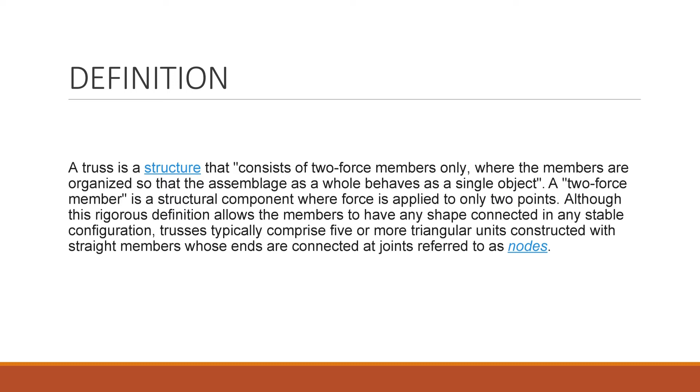For the characteristics, we have 3 types of truss. The first one is a simple truss. This type of truss is seen in a frame roof consisting of rafters and a ceiling joist, and in other mechanical structures such as bicycles and aircraft.

The stability of this shape and the method of analysis is used to calculate the force within it. A truss comprised entirely of triangles is known as a simple truss. A simple truss is often defined more restrictively by demanding that it can be constructed through successive addition of pairs of members, each connected to two existing joints and to each other to form a new joint. This definition does not require a simple truss to comprise only triangles.

The second truss is planar truss. Planar trusses are typically used in parallel to form roofs and bridges. The depth of the truss, or the height between the upper and lower chord, is what makes it an efficient structural form. The third one is space frame truss.

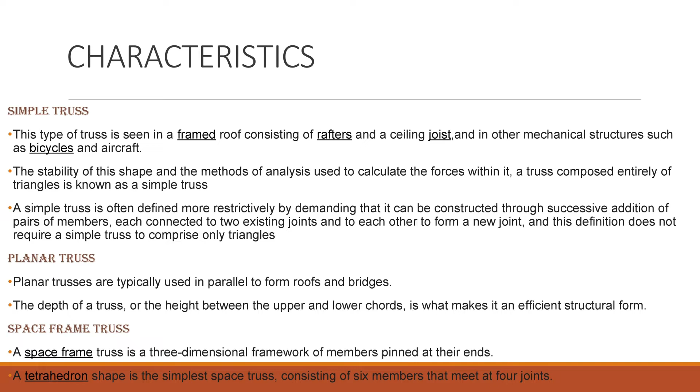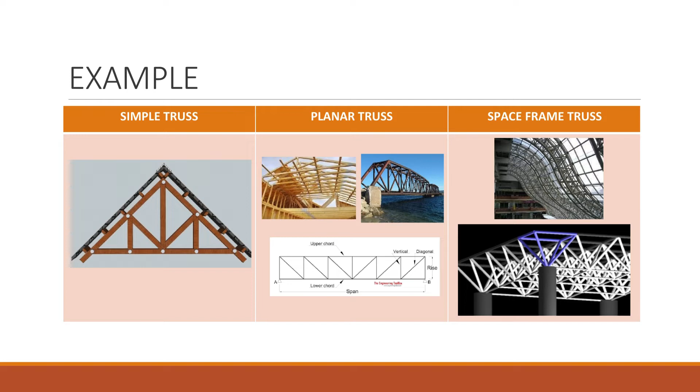There are 2 basic types of structure. The pitched truss or common truss is characterized by its triangular shape. It is most often used for roof construction. Some common trusses are named according to their web configuration. The chord size and web configuration are determined by span, load, and spacing.

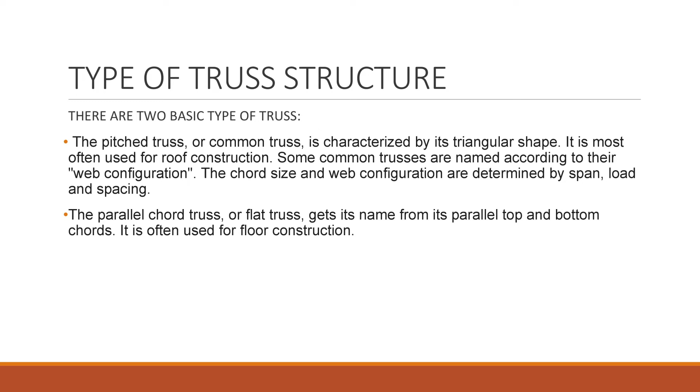The parallel chord truss or flat truss gets its name from its parallel top and bottom chord. It is often used for floor construction.

The second one is octet truss. The minimum composition is two regular tetrahedrons alongside which an octahedron forms. They fill up 3-dimensional space in a variety of configurations. This octet truss is a combination of triangles that can form a 3-dimensional shape. So when combined it becomes one structure. It can be a floor, it can be a structure for a building too.

For the third truss is Pratt truss. The design uses vertical members for compression and diagonal members to respond to tension. This type of truss we basically can see at bridges. There are a lot of bridges using this type of structure. For example, Pratt truss and Howe truss.

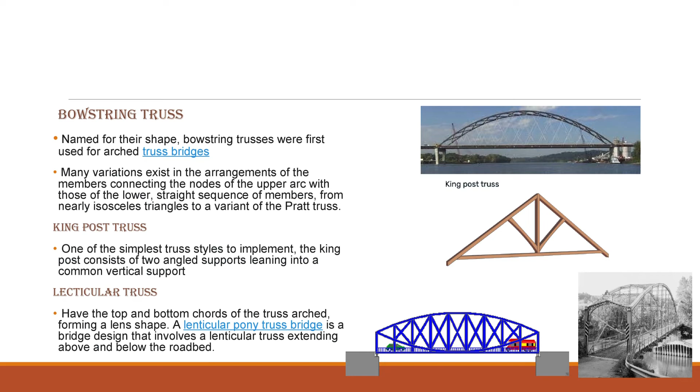So the next one is the lenticular truss. The top and bottom chords of the truss arched, forming a lens shape. A lenticular pony truss bridge is a bridge design that involves a lenticular truss extending above and below the roadbed. So an example of a lenticular truss bridge is the Smithfield Street Bridge in Pittsburgh, United States.

So the next one is the town lattice truss. The town lattice truss uses easy-to-handle planks arranged diagonally with short spaces in between them to form a lattice.

Then the last one is the Vierendeel truss. The Vierendeel truss is a structure where the members are not triangulated but form rectangular openings, and is a frame with fixed joints that are capable of transferring and resisting bending moments. So this one is different because the other trusses are shaped from triangles, but this one is a rectangle with a wide opening frame.

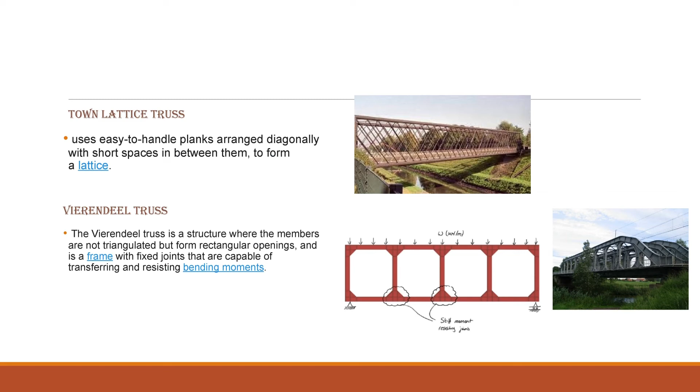So the next is joints. After determining the minimum cross section of the member, the last step in the design of a truss will be the detailing of the bolted joints, involving shear stress of the bolt connections used in the joint based on the needs of the project. Truss internal connection joints can be designed as rigid, semi-rigid, or hinged. Rigid connections can allow transfer of bending moment, leading to the development of secondary bending moments in the members.

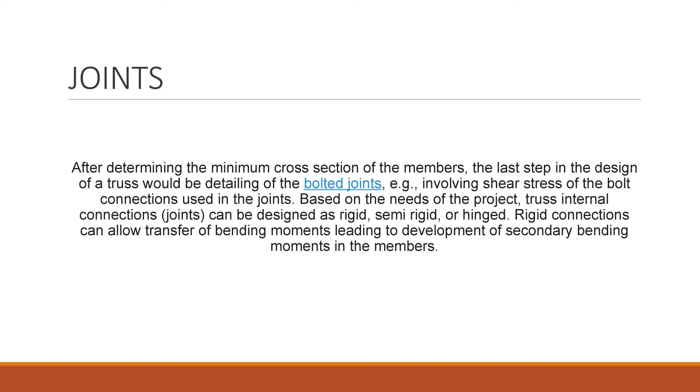So analysis: because the forces in each of its two main girders are essentially planar, a truss is usually modeled as a two-dimensional plane frame. The analysis of trusses often assumes that loads are applied to joints only and not at intermediate points along the members. Half of the weight of each member may be applied to the two end joints, provided the members are long and slender. The moments transmitted through the joints are negligible and the junctions can be treated as hinge or pin joints.

Every member of the truss is subjected to pure compression or pure tension force. Trusses are physically stronger than other ways of arranging structural elements because nearly every material can resist a much larger load in tension or compression than in shear, bending, torsion, or other kinds of force.